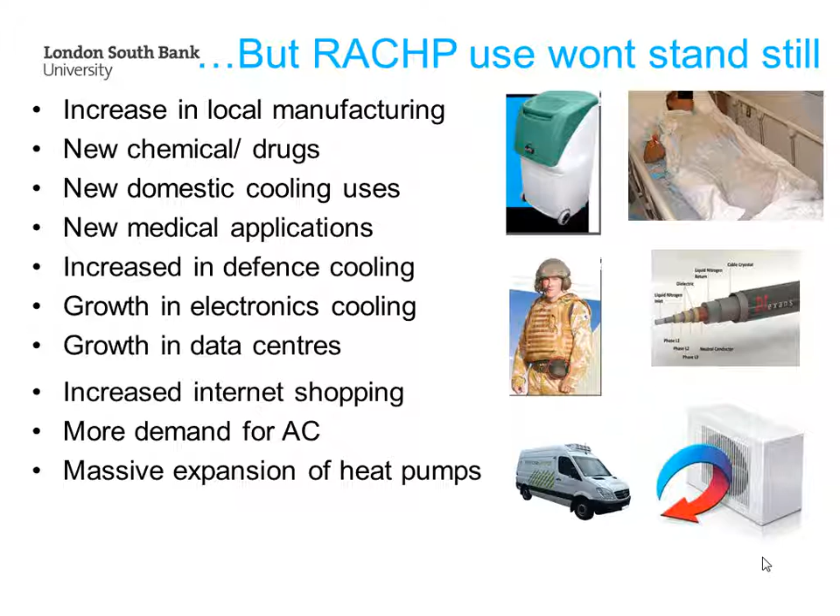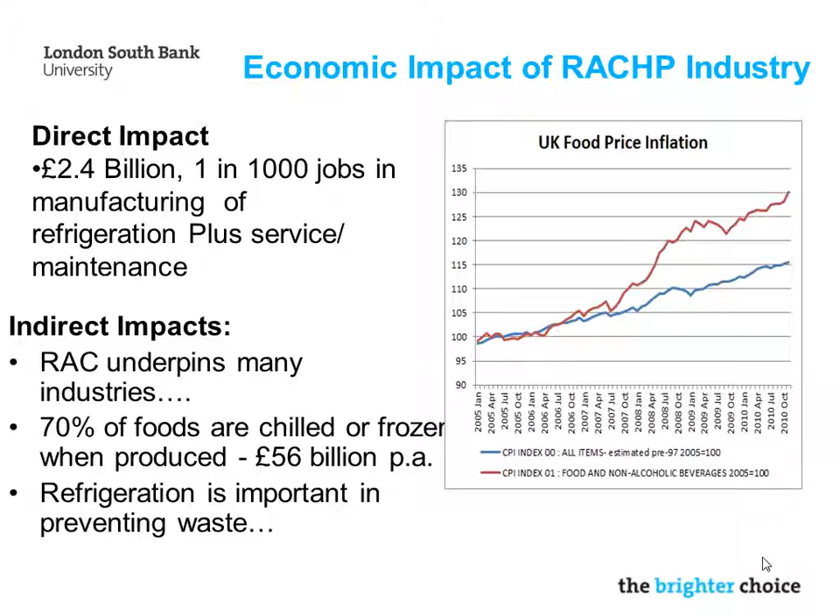70% of foods are chilled or frozen, and refrigeration is really important in preventing waste. We've all seen the cost of our shopping go up. Waste and minimising waste is going to be really important for us in the future.

The economy is important, but there are two challenges ahead that I'd like to highlight: firstly, population growth and resource availability, and secondly, climate change.

But the most important point about that is the actual change in the demographics will be really important. So out of that, currently 3 billion of the developing world will become developed - they will become consumers, and as a result they will consume more materials, commodities, energy, water, buildings, etc. So the tension on materials and demand on materials will increase massively over the next 50 years, and we will see that.

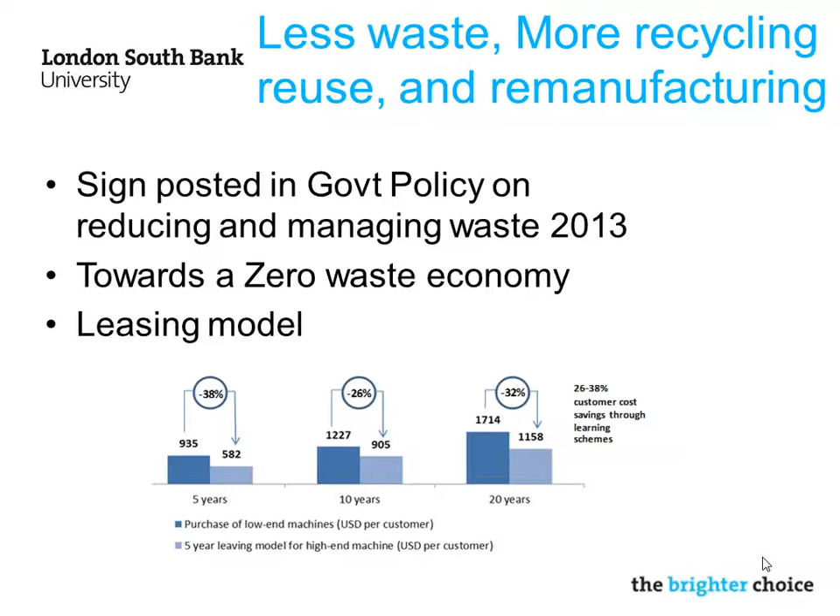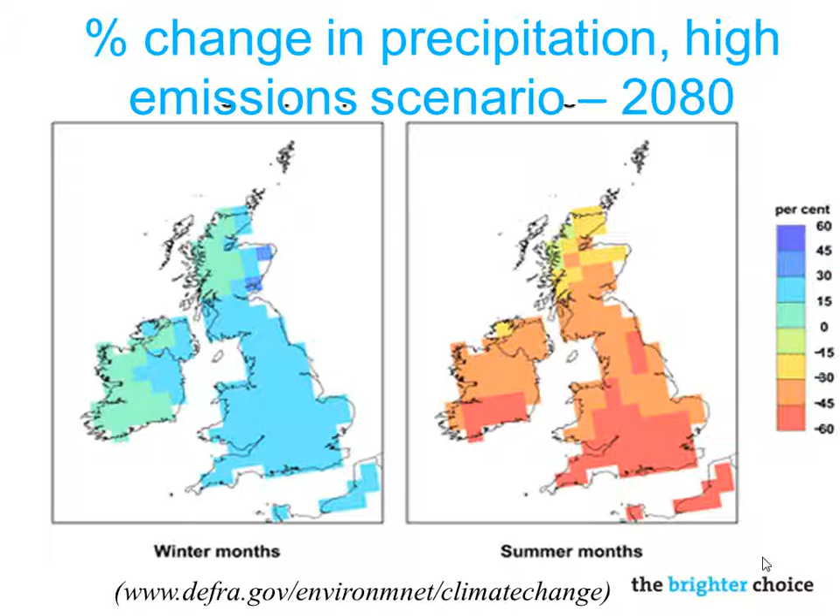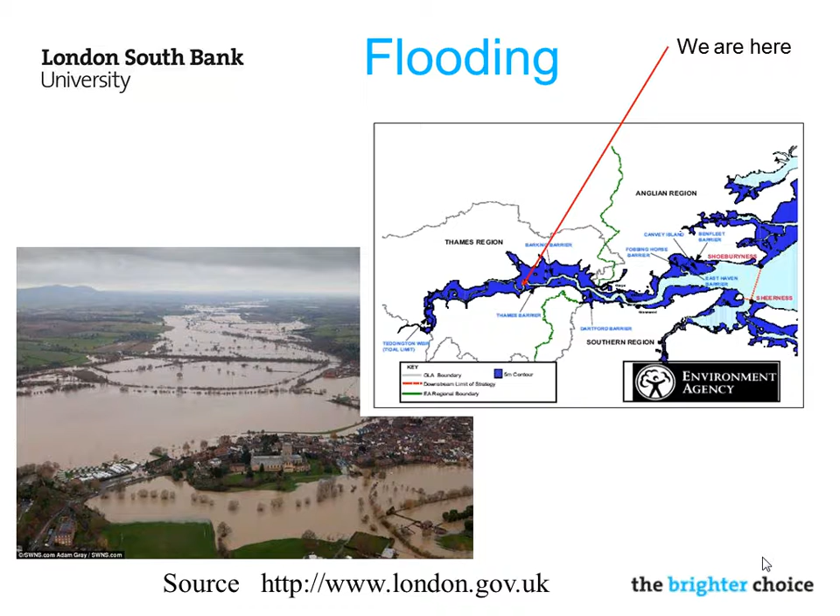Some people say it's a one-off, and I have evidence against that. If you look at the Thames barrier closings, this was a flood defence to help protect London. It was constructed in '83, and it was suggested it would close once a year.

Some people put it down to greenhouse gas emissions, global warming. We're told there are 6 greenhouse gases, including carbon dioxide and HFCs, hydrofluorocarbons, which we currently use in refrigeration. So refrigeration is responsible for these gases. My question to you is...

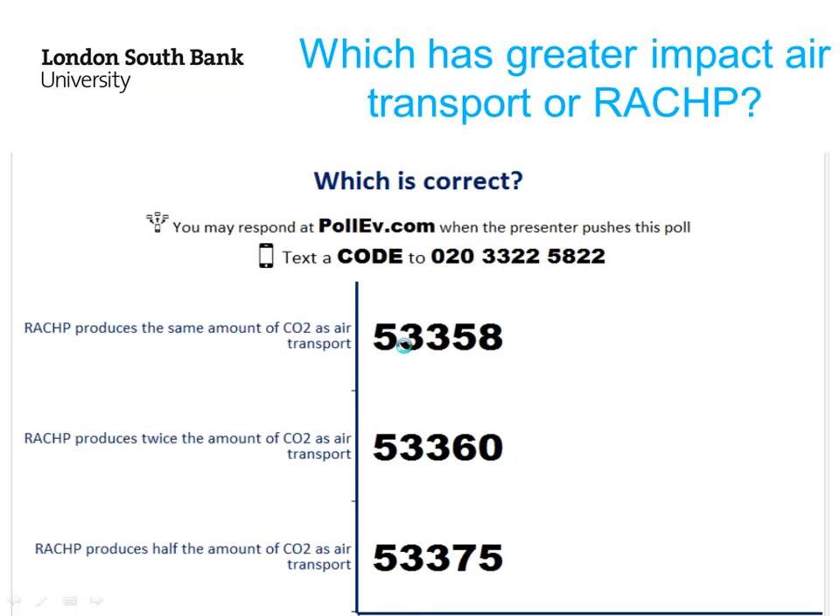Hang on, hang on, hang on. There we go. Oh, we've got some votes already. Can you see the number there? Yeah.

So which is correct? Does refrigeration and air conditioning produce more greenhouse gases, the same amount, or does it produce less than air transport?

We're split at the moment. You can try if you can't. We'll send you a text back saying. Okay, we'll leave it a little bit just to make sure everyone has a chance to vote. So there's a split, it looks like. But the winner at the moment is RAC produces half the amount of greenhouse gas as air transport. Oh, yeah, it's the air transport that's winning.

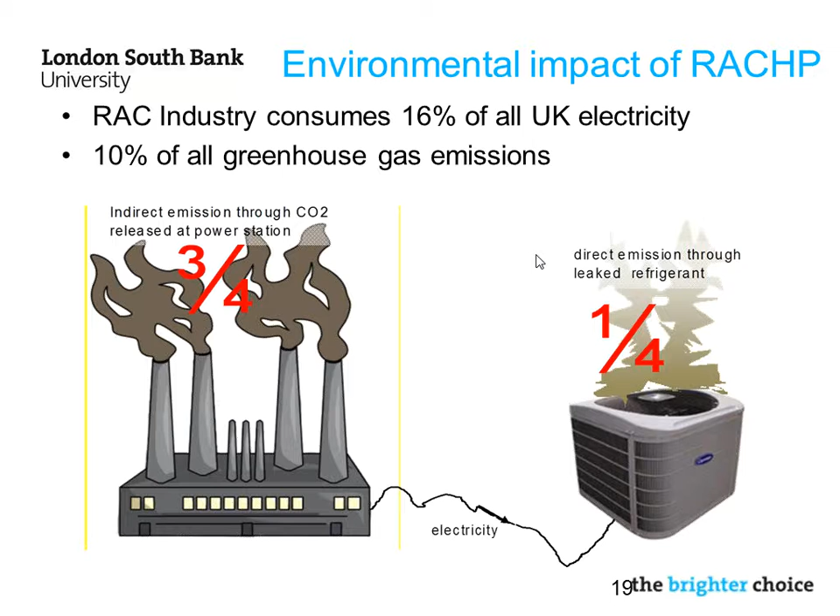So we're a big emitter, and therefore we have a big responsibility to reduce our emissions. The UK government signed up to the Climate Change Act, which said we would reduce our carbon footprint by 80% by 2050.

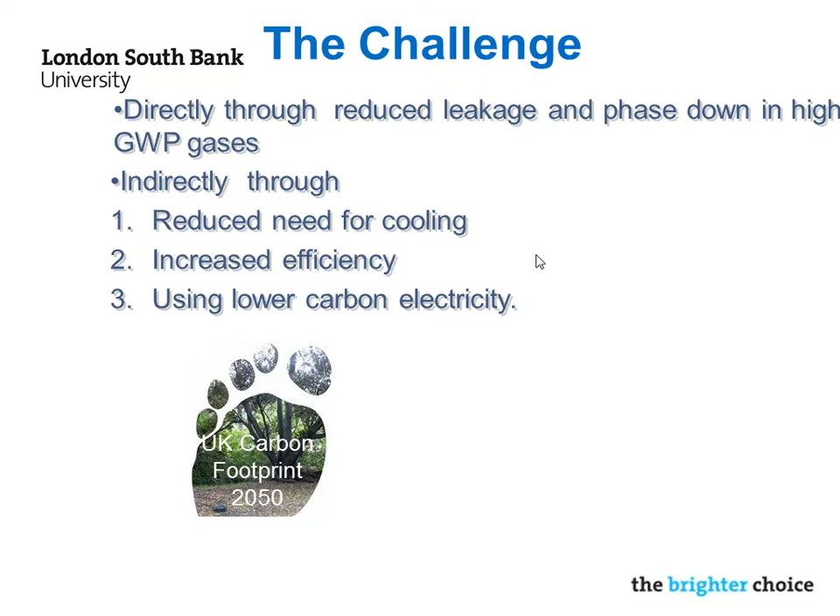To do that, we have a responsibility as a refrigeration industry. We are doing that directly through reduced leakage and phase down of high global warming gases. But the indirect is the biggest amount, and that's the one we have to address. Indirectly, we can reduce our emissions through three ways: reduced need for cooling, increased efficiency, and using low carbon electricity.

As an academic, I like an equation. My equation says an 80% reduction can be achieved by using a product of 0.6, 0.6 and 0.6, giving 0.216. Therefore, if I reduce this to 60%, increase this by 40%, and reduce this by 40%, I can get to 20%, just by working all these three things together. That's really important, really important, to work on those three things together.

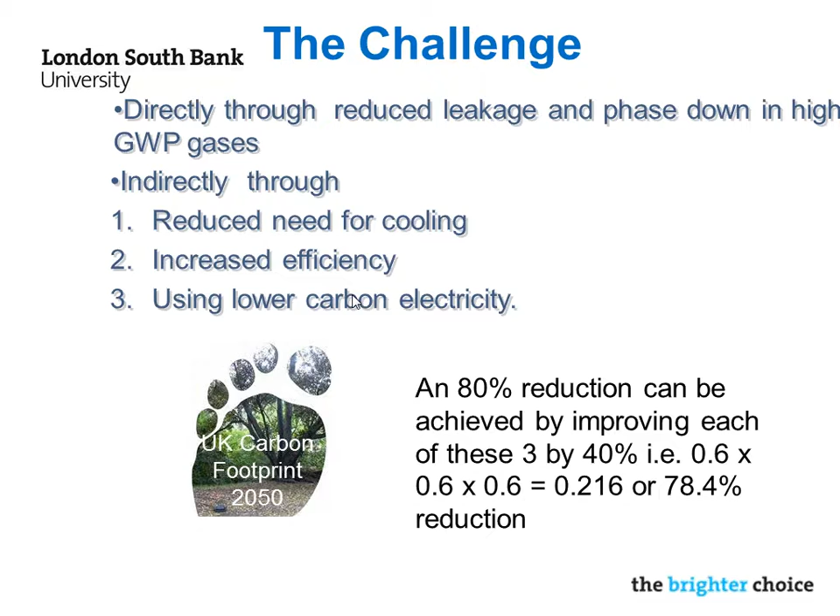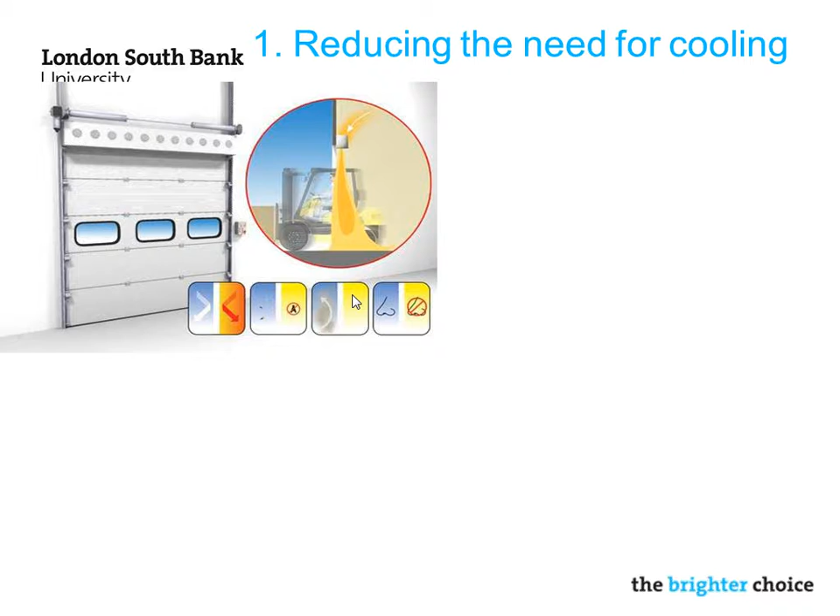So how would I reduce the need for cooling? Well, if I had a building or a cold store, I would close the door, keep the cold in. Or we'd make sure the insulation is the appropriate thickness and that it works. This is a thermography picture showing a cold store with some cold bridging.

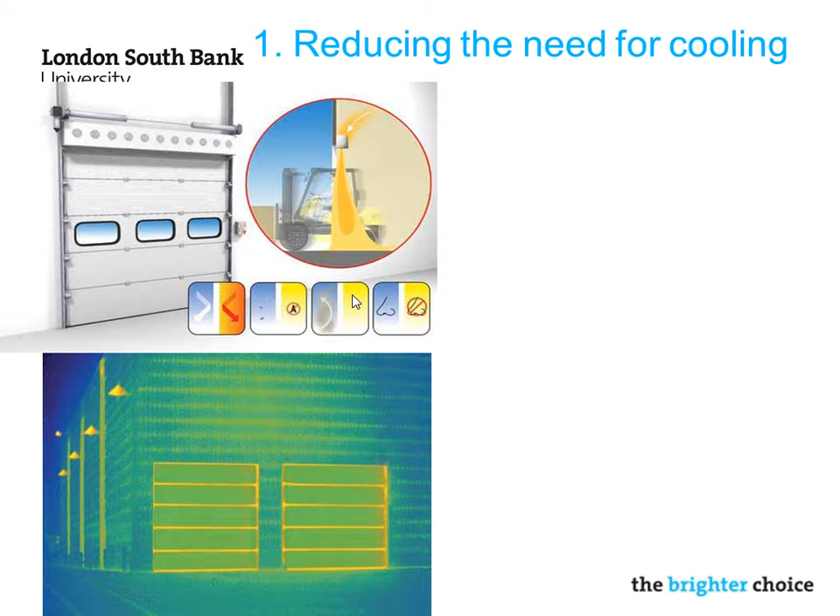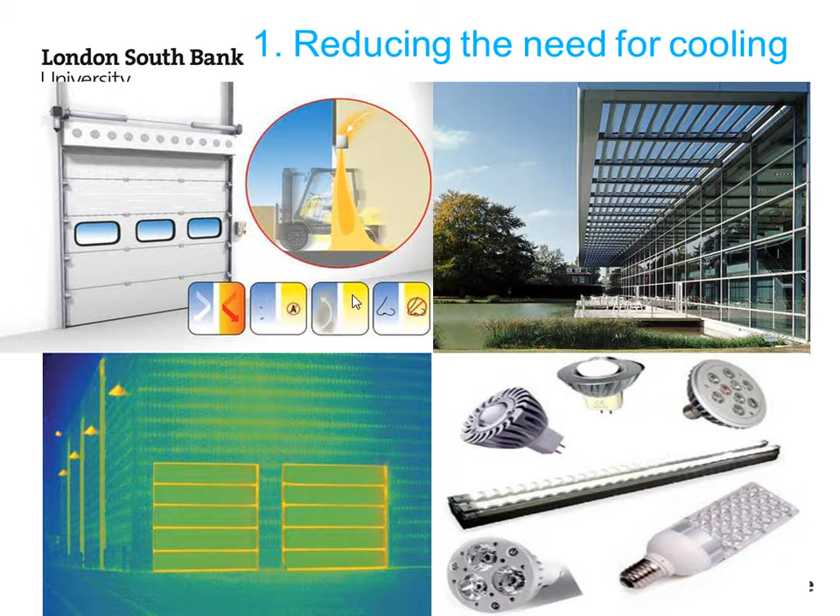Or we would keep the sun out with some shading. Or we would make sure we used low energy internal lighting to reduce the load in the first place. And the final thing we would do is buy the best piece of equipment we can in the first instance. For instance, supermarket display cabinets.

We'd see these, there's thousands of these in the country. This is a bit of a busy slide, but it shows the energy consumption and display area for a number of different refrigerator display cabinets. The ones I'm interested in are these green triangles, specifically these two here. This is Judith Evans' work, by the way, Judith is back there. You can see this one has a total energy consumption of nearly 60 kilowatt hours per 24 hours, whereas this one is probably about 6. So if I choose this one, my demand is 10 times that of this one.

But they do exactly the same thing. Which one does the customer buy? The cheapest. And which one is the cheapest? The top one. So it's really important we buy the right piece of kit to start with.

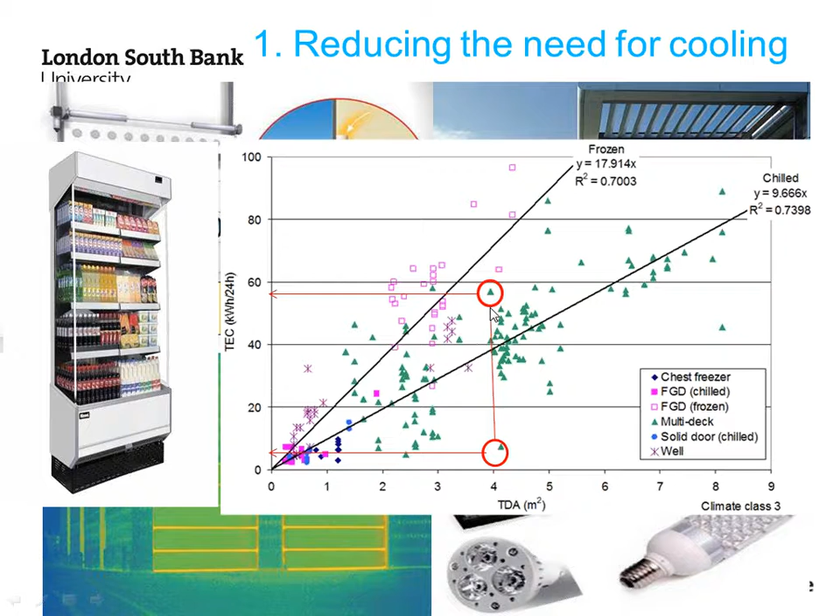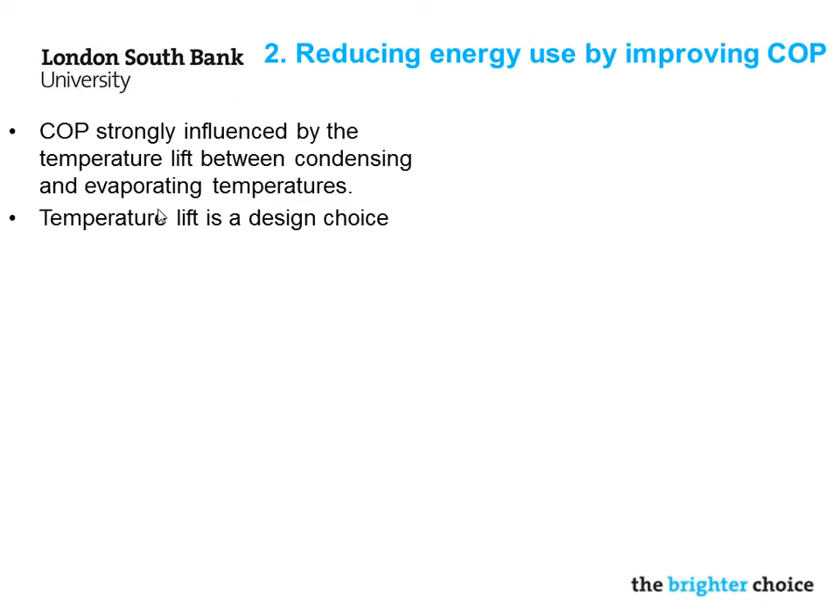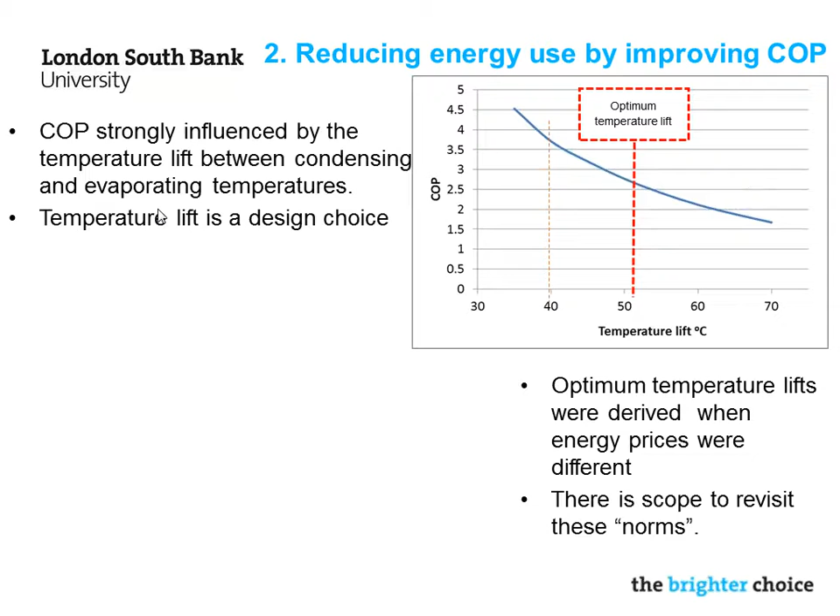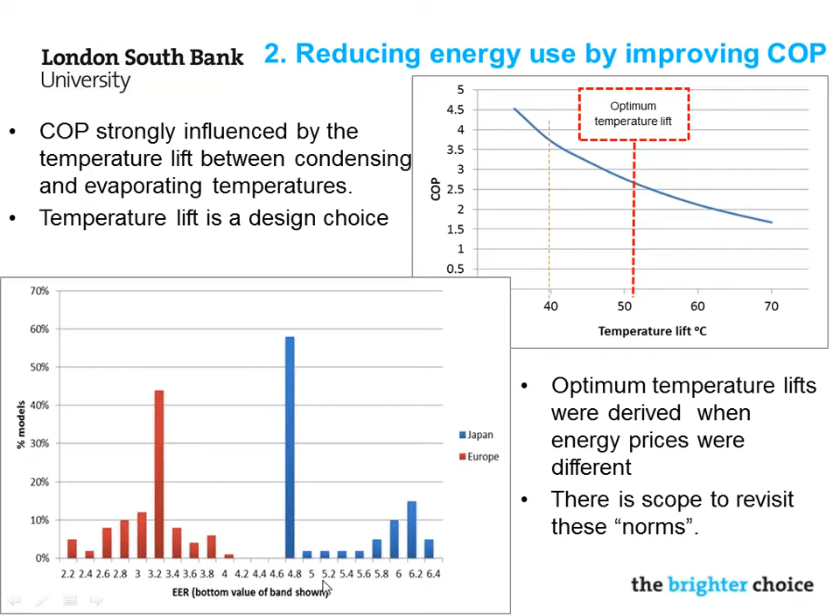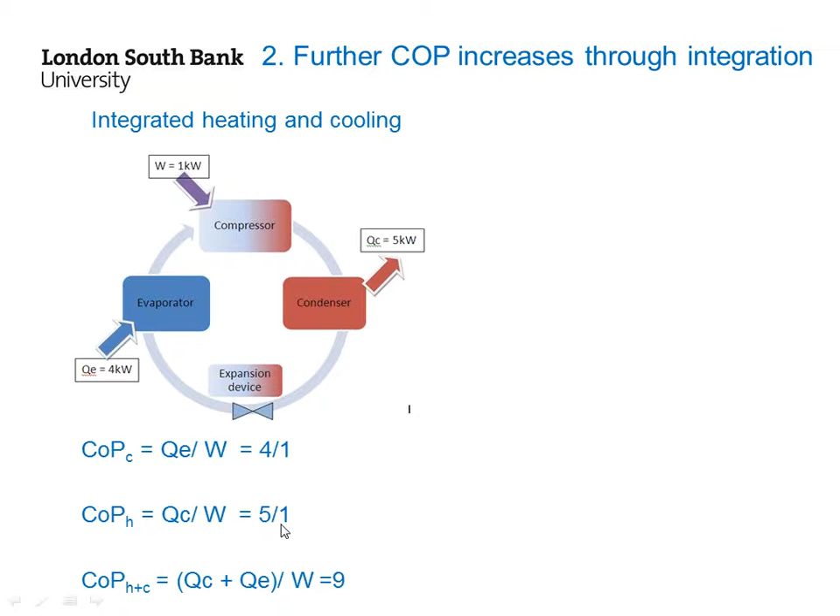COP in cooling mode is the cooling capacity, 4, divided by the compressor input, 1, so it's 4. In heating mode, it's 5 divided by 1. In cooling and heating mode combined, we can get 9. We need to try and work out how we can achieve those sorts of COPs, maybe by sharing heat with someone else while we use the cooling.

And what we must do - this is a no-brainer - we must insist that our chiller manufacturers install these de-superheaters on our hot water systems, so that we have hot water produced at the same time we have cooling. This is the de-superheater, it's in the paper.

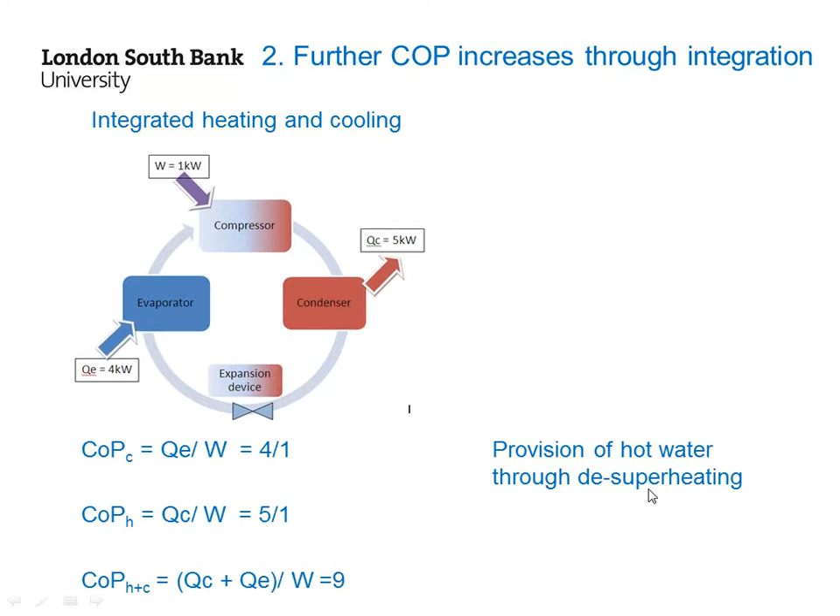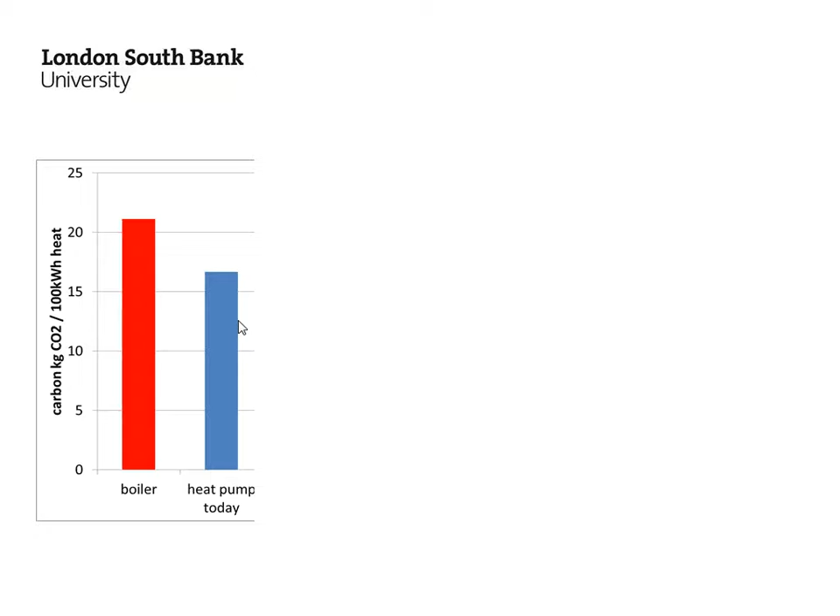Heat pumps are really important for the future. This slide shows the kilograms of CO2 produced per 100 kilowatt hours of heat for a boiler and a heat pump, based on today's efficiency and carbon factor from the grid. In the future, as we use more nuclear and more renewables, the carbon factor of the grid will go down, so this is the carbon that's going to be produced. If you go to 2035, potentially we've got a fifth of the carbon or less compared to conventional boilers. So refrigeration can effectively minimise the carbon produced from heating.

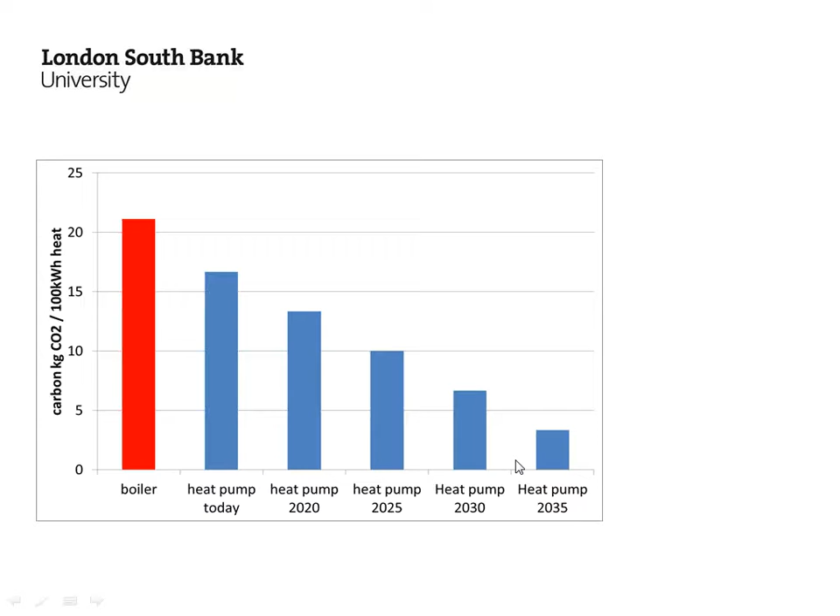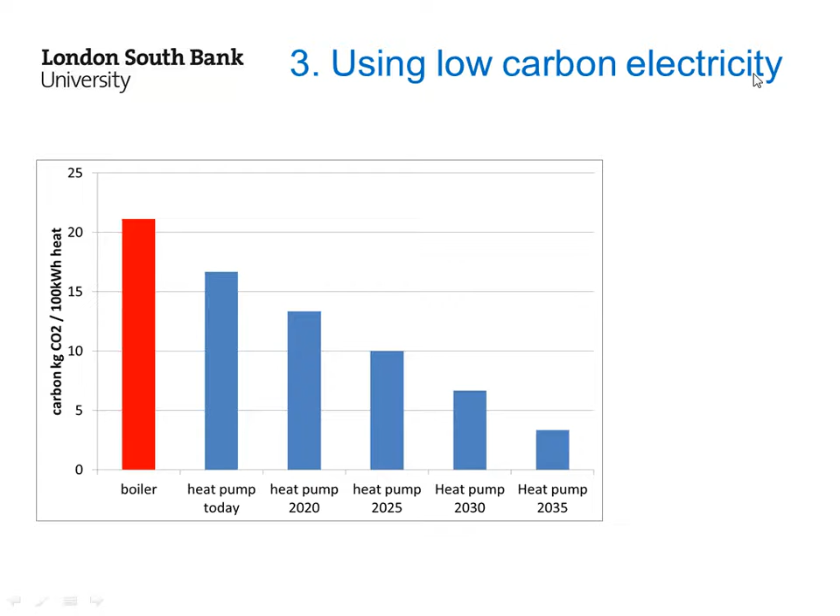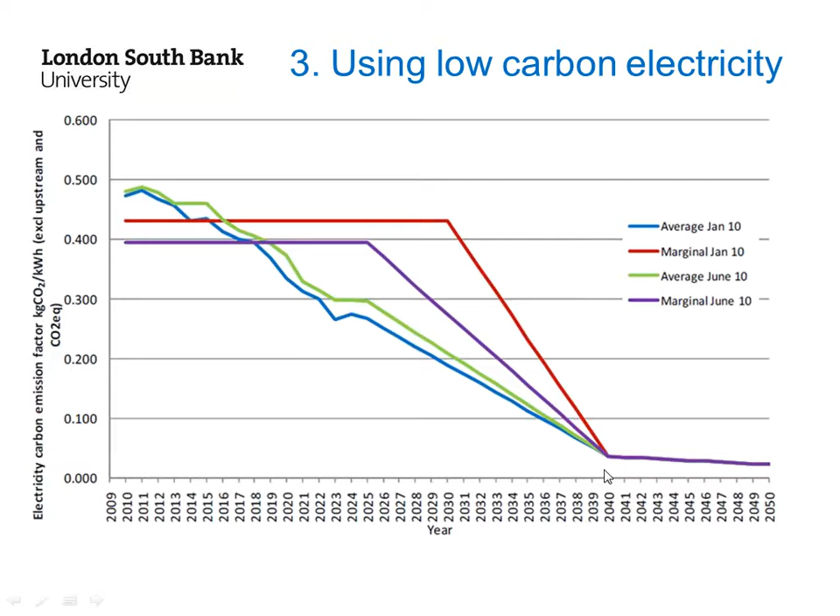And the final thing I wanted to talk about in terms of improving our efficiency was to use low carbon electricity. So picking up on the same thing, these are the carbon factors that are potentially going to happen in the future. We're currently here, in 2012, with a carbon factor for electricity of 0.5, but it's going to drop and drop until it's 0.05, something like that.

Why do we think that's going to happen? Because that's what's in our legislation. That's what the Climate Change Act says - 80% reduction of carbon by 2050 - and the Energy Bill says we're going to achieve that by decarbonising our electricity grid, through low carbon technologies and nuclear power.

Is this a good way of working? Well, DECC seem to think it is, and they've produced lots of models, modelling cooling demand until 2050, and they think cooling demand is best kept constant, achieving our reduction through nuclear and renewables.

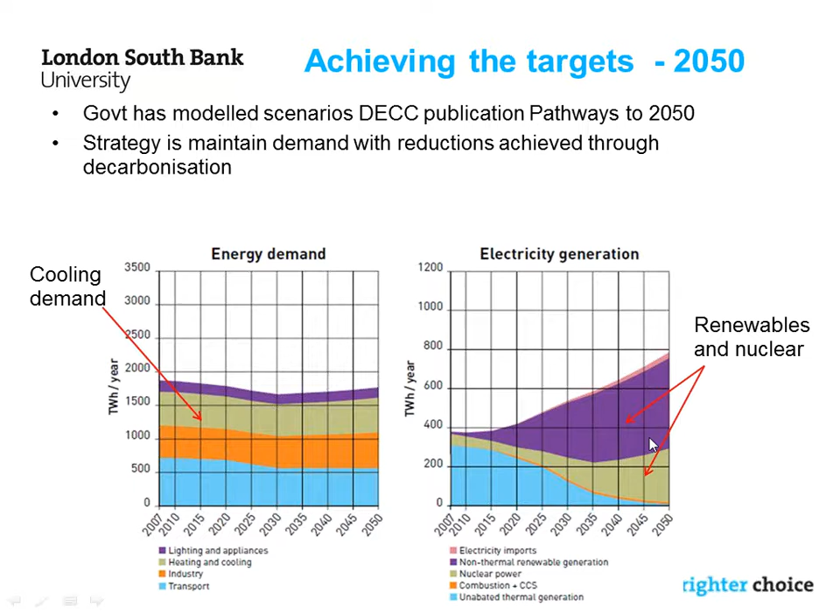I don't agree with that. I think we should be doing something different, because this policy is too focused on renewables and nuclear. Look at the cost of renewables, PV as seen on many homes is expensive, £800 per tonne CO2, whereas the cost of abatement through energy efficiency and refrigeration is much less. So the government should be investing more money in energy efficiency schemes rather than PV, which is publicly very obvious. But if they invested the same amount of money into energy efficiency in refrigeration, it would have a much bigger impact.

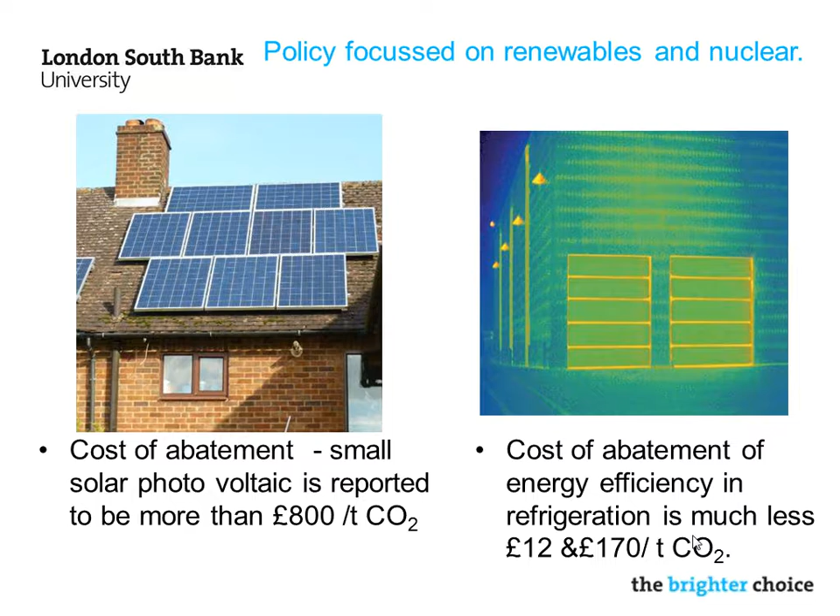Looking forward, without any significant incentives, how are we going to change, and how are we going to move forward? I've highlighted two enablers. The first one is money. Money makes things happen, okay? And if we can tune in money with reducing carbon emissions, we can deliver carbon emissions.

This was a subject of David Bostock's presentation recently to the IOR. If we aim at reducing money at the same time as reducing our environmental impact, we can do the right thing for the wrong reasons. Okay, so that's one enabler we should look at.

And the second thing is best practice engineering. There's lots of good stuff that we do, but we need to do more of it. This was highlighted at a recent conference by Brian Churchill of ASDA. I want to give a couple of examples of where I think money and best practice will be so important for us as an industry moving forward. The first one is how we purchase refrigeration equipment.

How do we purchase? What do we use as the main criteria for deciding on a purchase of refrigeration equipment? The cheapest, that's right. We purchase often on capital costs at the expense of energy. And as we've seen with Judith's graph earlier on, we can buy exactly the same piece of kit, one that uses 8 times more energy than the other. Which one do we buy? We buy the cheapest.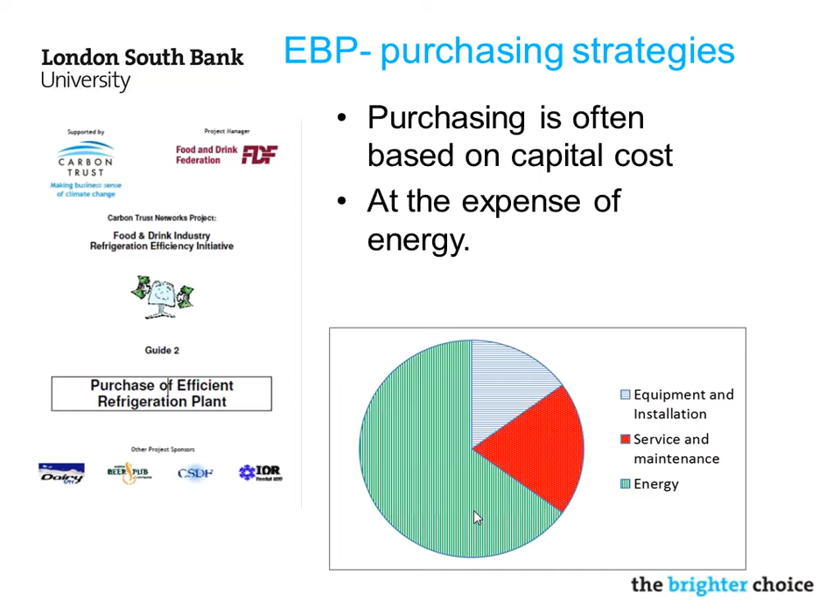However, if you look at the life cycle cost, it's not dominated by the equipment installation or the service and maintenance - it's dominated by energy. And therefore, if we do a life cycle calculation, it's much better for making an objective choice - much better for getting the best system. So life cycle techniques are really important, and if you look at this guide, it's got some really good life cycle techniques within it.

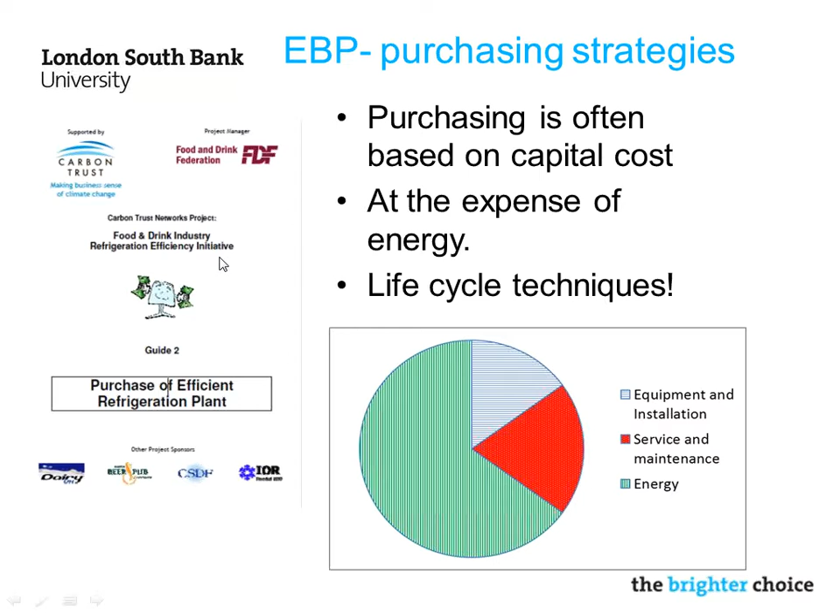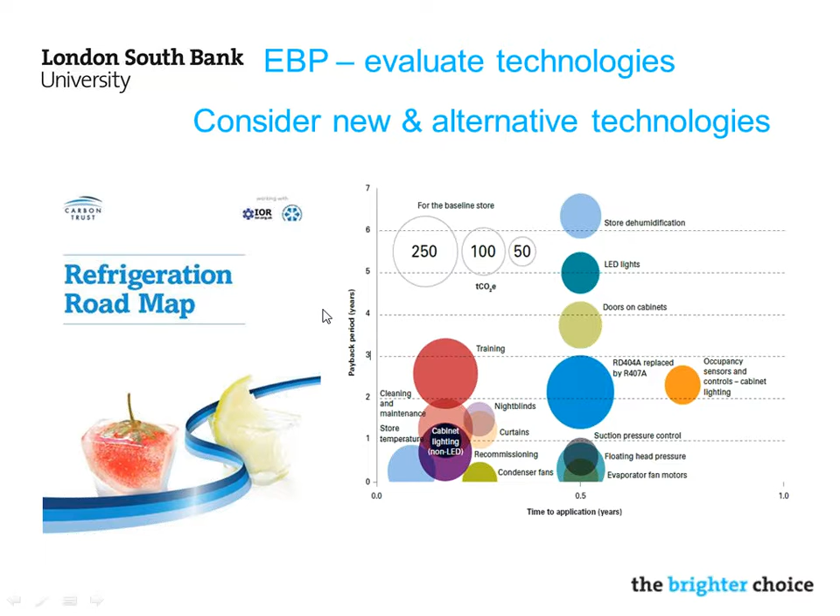New technologies - again, there's lots of new technologies coming on. There's the refrigeration roadmap, produced by the BRA and the IOR in collaboration with the Carbon Trust. One of the critical things about it is it shows how much carbon you can save and also how much things cost.

Cost of failure, reliability is really important. This is some work we've been doing with the IOR over a number of years, looking at refrigerant leakage - what happens if you get a leak in this case, a supermarket? Typically, Christina's here, she found by looking at 1,500 supermarket records, if you get a refrigerant leak in a supermarket, you lose 20 kilograms of R404A in this instance. That has a cost, £300. There's also a cost of repair, £500.

There's also a stock loss. My colleague Akosh - I asked him one day to go to Tesco's in Brixton and work out how much food is in the cabinet. He did it, came back the next day and said this cabinet on the bottom has got £4,000 worth of food in it, and the one above's got £2,000 worth of food in it.

And if your refrigeration system goes down, you lose £2,000 worth of food, plus the cost of the carbon, and you lose £4,000 for one leak. So put in monetary terms, it has a much bigger impact. However, in carbon terms, 20 kilograms of R404A is equivalent to 80 tonnes... that's something like 20 times what my family would produce in a whole year. So 20 families for a year is the same as one leak. It's massive.

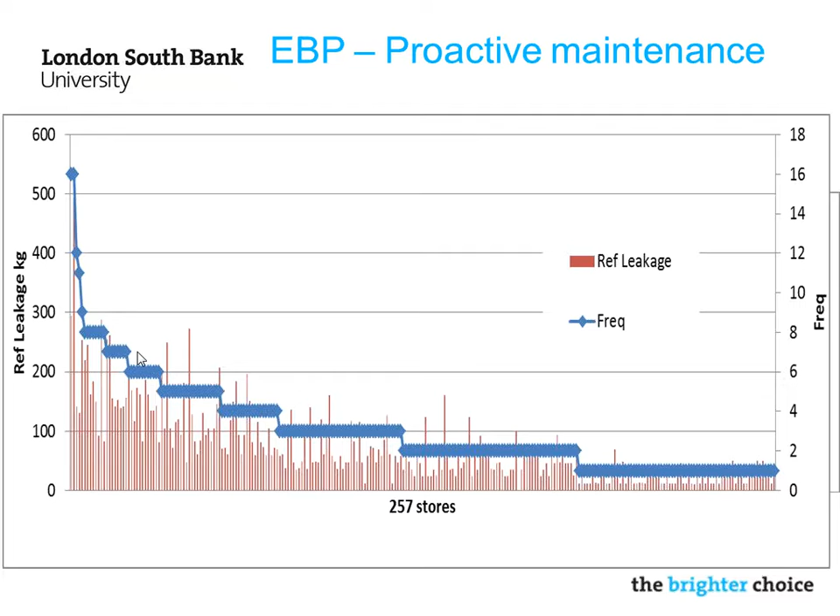This is what ASDA have done, I think, and this is their leakage rate. Again, this is a figure from Christina's work based on some data she had. She looked at which stores were leaking the most and targeted them. It's not difficult to target the ones leaking the most. That's good engineering practice.

So the last part of my talk, I wanted to talk about resourcing our profession. When I thought about resourcing our profession, I wanted to think about what a cooling industry might look like in the 2020s. I couldn't find a picture of what our cooling industry might look like in the 2020s, so I found one that it shouldn't look like.

This shows everything about what we shouldn't do in cooling: random, ill-considered, badly installed, unable to service and maintain, all of those things.

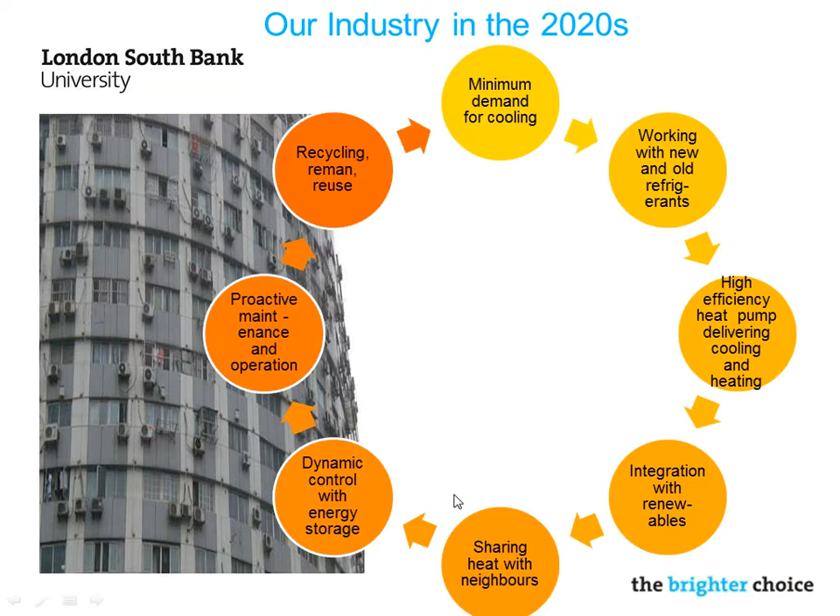Actually, what we should be doing is these things. We should be minimizing cooling. We should be working with new refrigerants. We should be ensuring our systems have high efficiency in delivering cooling and heating together. We should make sure our cooling and heating systems integrate with renewable technology. We should share our heat with our neighbours. Dynamic control, we should store. Proactive maintenance, we should recycle, remanufacture and reuse. That's what I think our industry should head towards if we're going to meet our obligations in the future.

How are we going to do this? Well, I put down a list of things I thought were important for us as an industry. Ultimately, we need to have good fundamentals. We also need to recognise that we're a really important industry for society, and we need to tell the world we're important. We're not metal bashers - we're a really important industry that performs a fantastic service for society, and we need to tell the world that.

We need to make use of the best IT. And to these young guys at the back - my daughter does all these things with mobile phones and whatever, and there's fantastic things you can do with these things these days. You need to try and bring that into our industry, because it's got massive opportunity.

We need to be able to communicate effectively with customers and end users. So if they decide they want to do something silly, you need to be able to tell them: are you aware that if you do that, it's going to cost you this amount of money per year? It's silly - those sorts of things. And we need to work closely with other trades and professions, integration, but we also need to be able to adapt and learn new skills as they evolve.

Recently, Doug Richard, Lord Richards, produced an apprenticeships report, and what he said was industry needs to take greater ownership of both standards and delivery of education. I'm pleased to say the IOR is reinstating its education and training committee, with the aim of working with industry to do this, so that we're delivering the right skills for the future.